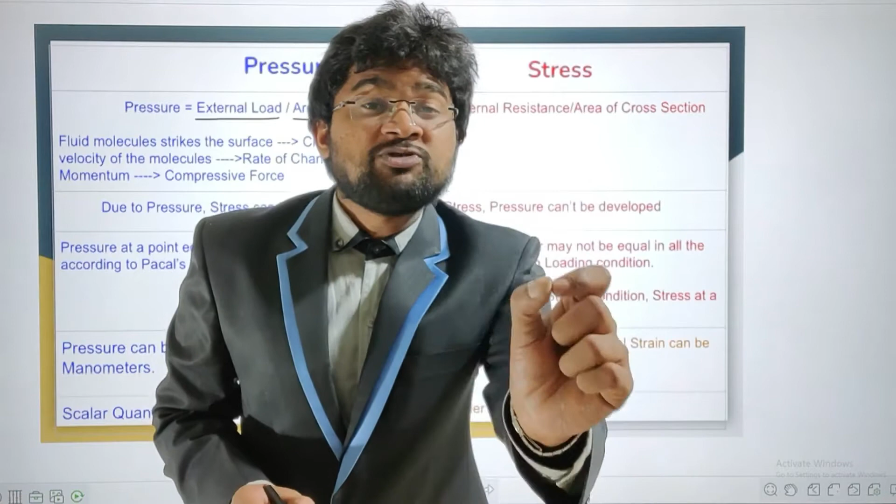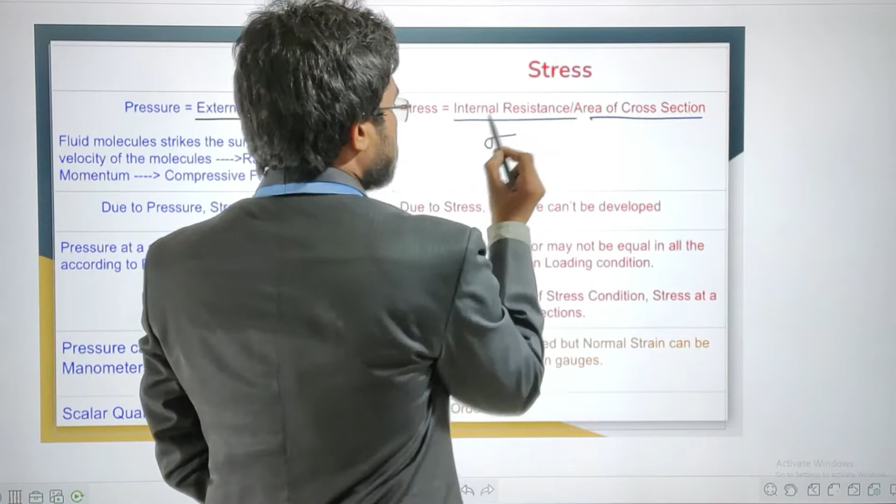Come to the definition of pressure. Pressure at a point is defined as the magnitude of external force acting per unit area of cross section. Now come to the definition of stress. Stress at a point is defined as the magnitude of internal resistance offered by the body per unit area of cross section. This is sigma, it will be P.

Now, if this question is asked in the interview, almost 90% of the people will give the same answer because everybody knows the definition of pressure and stress. But we need to give a different definition for pressure.

That is, we need to start from molecular level. Pressure is associated with the molecules. When these molecules strike the surface, the velocity of the molecules will change. Due to change in velocity of the molecules, change in momentum comes into picture. The rate of change in momentum is nothing but force. The magnitude of this particular force acting per unit area of cross section is called pressure. Pressure is always applied externally. It is always compressive in nature.

I want to give a single statement answer to differentiate pressure and stress. That is, if I pressure you, you will feel stress. Enough, both definitions are covered in a single statement. If I pressure you, you will feel stress. That is, the feeling should come from internally, pressure is applied externally. If your guide pressures you, you will feel stress. That is the single line statement for differentiating pressure and stress.

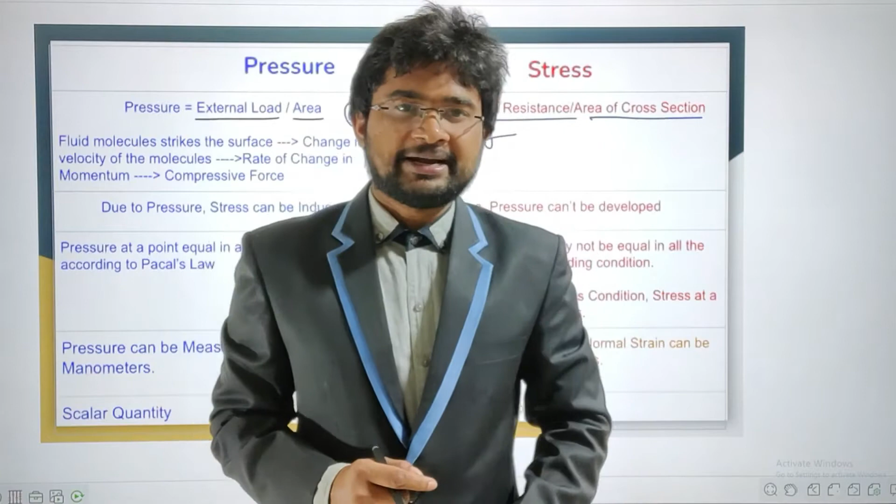Due to pressure, stress will be induced, but due to stress, pressure can't be developed. It is a very important statement. One more thing, pressure at a point is always compressive in nature, but stress may be either tensile or compressive. Pressure is a scalar quantity.

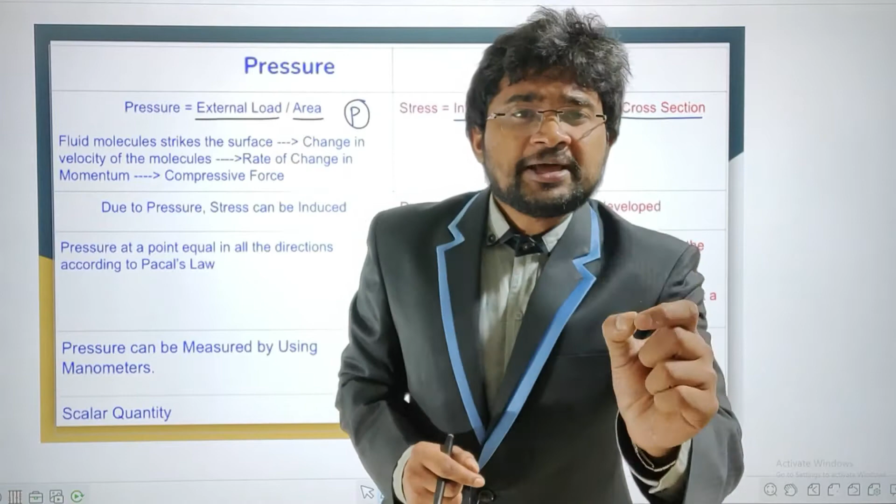Pressure is a zero order tensor. Stress is a second order tensor. We know scalar - scalar is a zero order tensor, only magnitude is sufficient. Go to some higher order - vector. To represent a vector, both magnitude and direction are required, so that is a first order tensor. To represent stress, we need 9 components, that is why we need to move to a higher order, that is second order tensor.

We need to represent the stress tensor in terms of a 3 by 3 matrix for triaxial state of stress condition. Coming to other examples of second order tensor, those are moment of inertia - it may be either mass moment of inertia or area moment of inertia, both are second order tensors. We need to represent moment of inertia in a 3 by 3 matrix.

Coming to rotation and image, both are orthogonal tensors. You can call them second order tensors - orthogonal ones. If the determinant of the orthogonal tensor is +1, you can call it a rotation matrix; if -1, an image matrix. Transformation is a combination of both rotation and translation. Translation is a first order tensor, that is a vector. Transformation is a third order tensor.

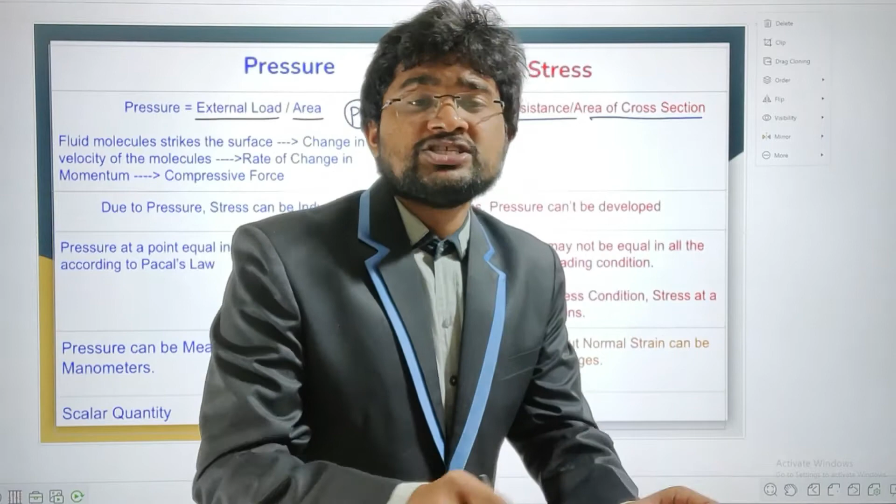According to Pascal's law, pressure at a point is equal in all directions, meaning it is independent of direction. That's why we call pressure a scalar. But stress at a point is not equal in all directions; it depends on the loading condition. Pressure can be measured using a manometer, but there is no equipment available to measure stress directly.

But normal strain can be measured by strain gauges. I conclude that pressure is defined as the magnitude of external force acting per unit area of cross section, while stress is the internal resistance offered per unit area of cross section. Pressure is a scalar quantity, while stress is a second order tensor.

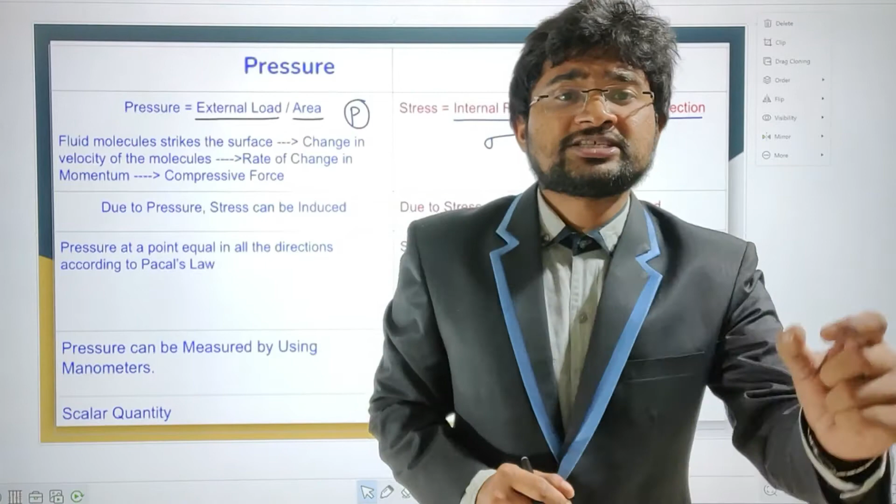Pressure at a point is equal in all directions, but stress at a point is not equal in all directions; it depends on loading condition. But for the hydrostatic state of stress condition, stress at a point is equal in all directions. Pressure can be measured, but stress can't be measured directly. Normal strain can be measured by strain gauges, and that is the input used to derive all the expressions of stress that you've already seen in the strength of materials course.

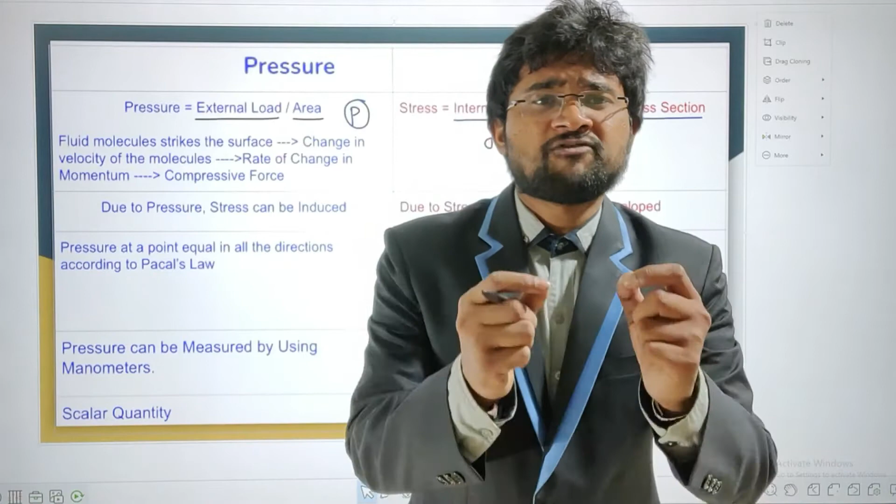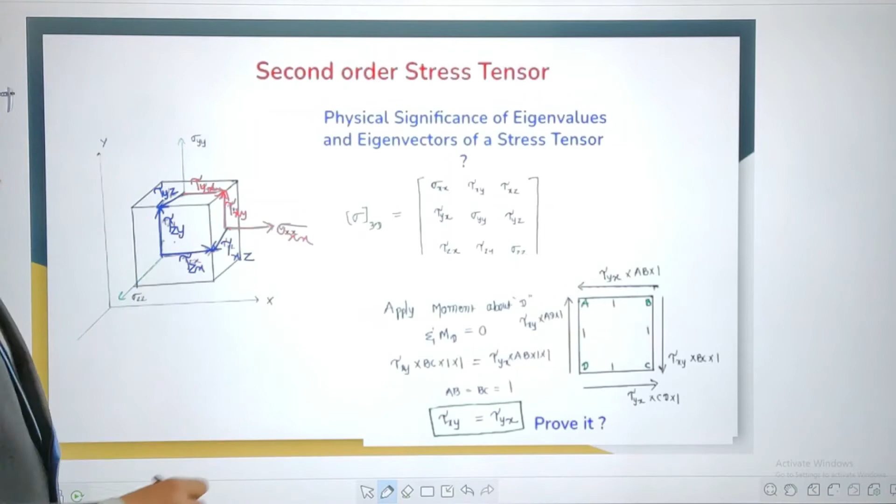X face and x direction. Here it is tau xy, x face and y direction. Here it is tau yx. Here it is y face and z direction. Tau, z face and y direction. Z face and x direction, x face and z direction. This is the box representation of stress. Stress is a second order tensor.

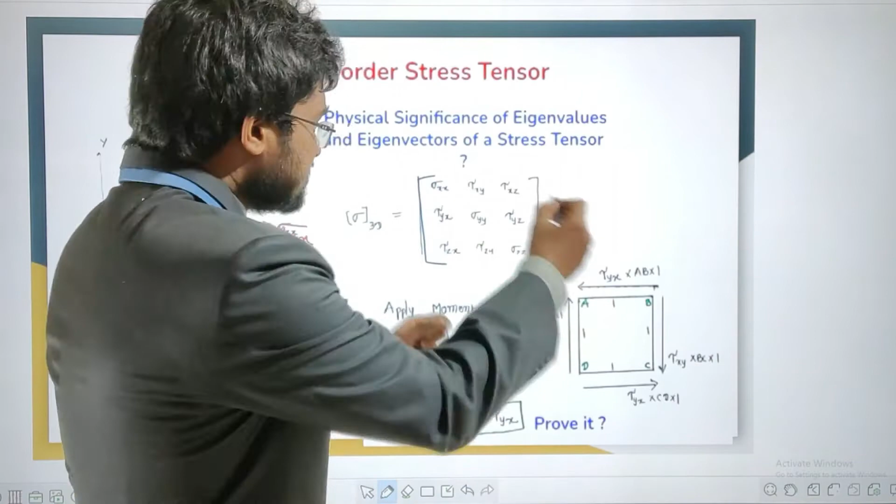Now the matrix representation of stress in 3D: sigma xx, tau xy, tau xz; tau yx, sigma yy, tau yz; tau zx, tau zy, sigma zz. This is the matrix representation of stress.

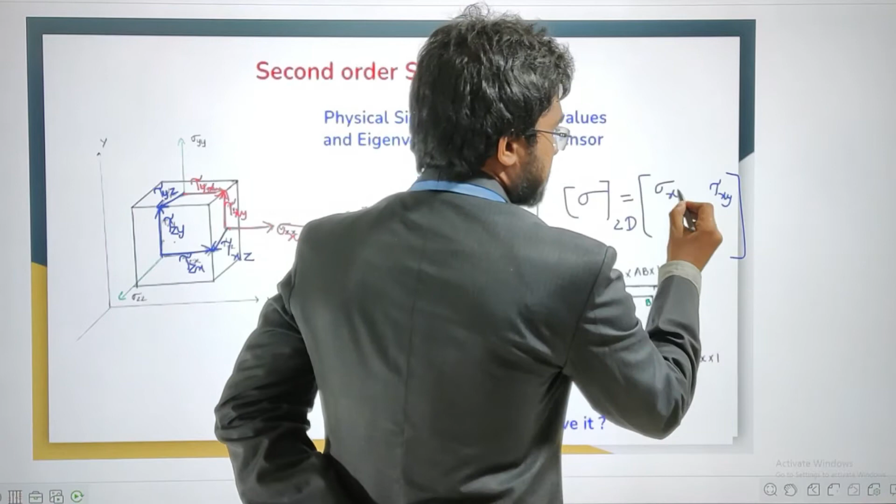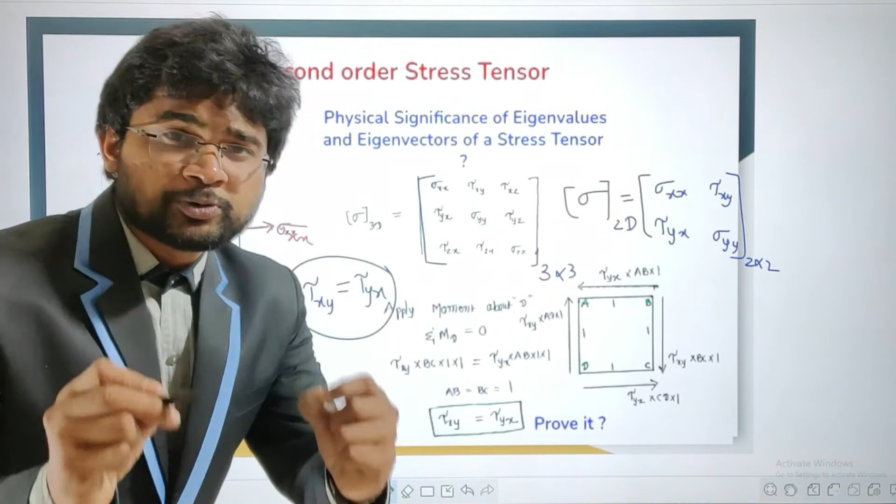Now if it is 2D: sigma xx, tau xy, tau yx, and sigma yy. This is for 2D. We need to prove tau xy is equivalent to tau yx.

State of stress diagram at a point for the pure torsion case. See here, this is... here it will be like this: x face in y direction is tau xy, and this is y face and x direction, tau yx.

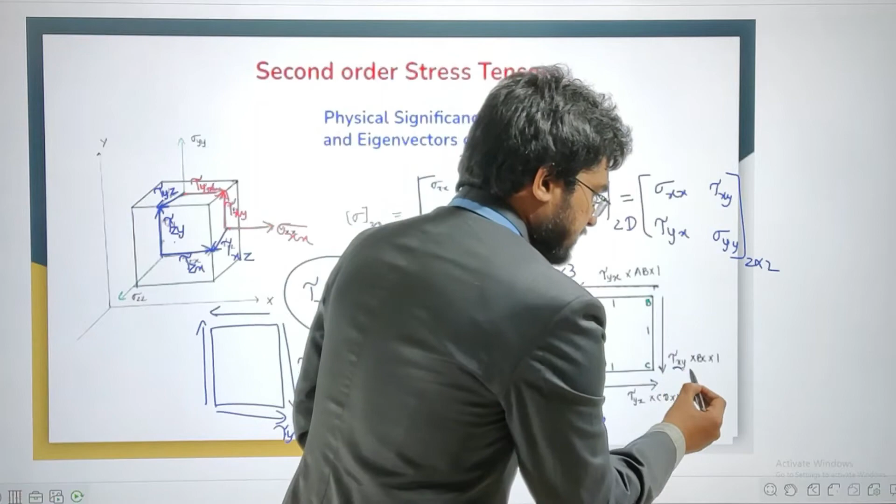I converted all the stresses into loads. Here, tau xy into BC into 1 — stress into area is nothing but force. So tau xy into BC into 1, and tau yx into AB into 1. I converted all the stresses into loads.

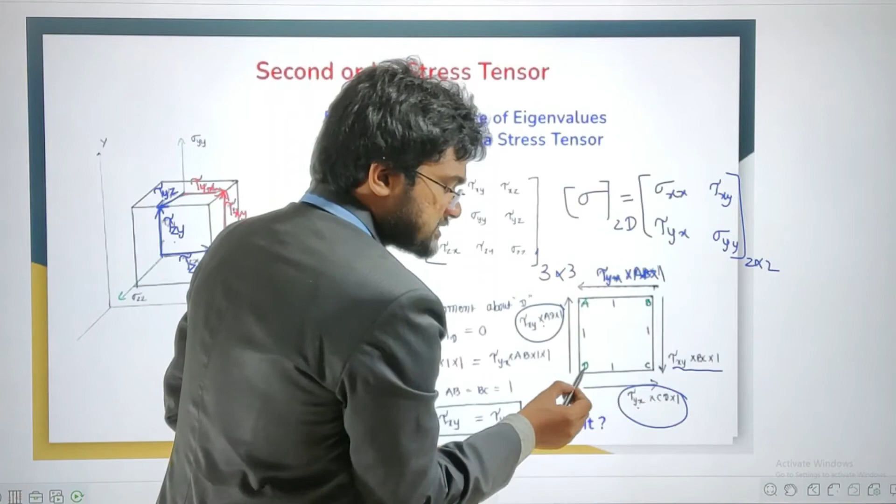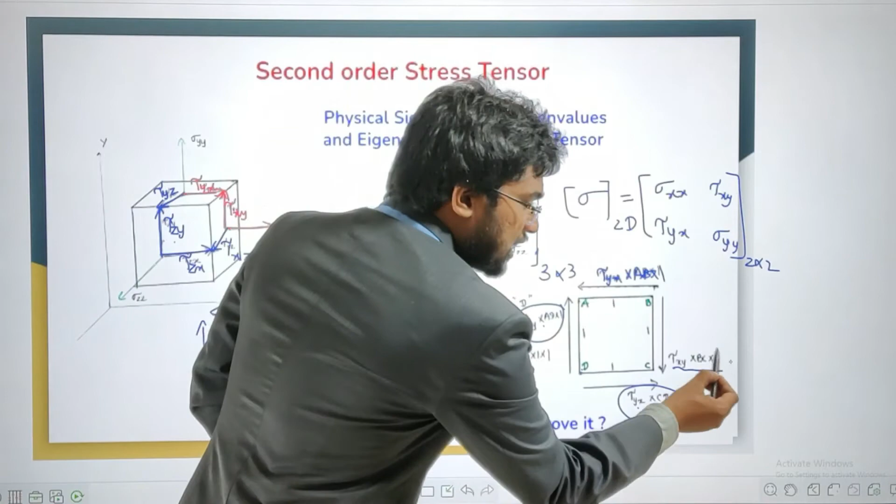Now apply moment about point D. The moment of these two forces about point D will become zero. The moment of tau yx into AB into 1 about this point will be in the anti-clockwise direction, and the moment of this other force about this point will be clockwise. Sum of the clockwise couples equals the sum of the anti-clockwise couples.

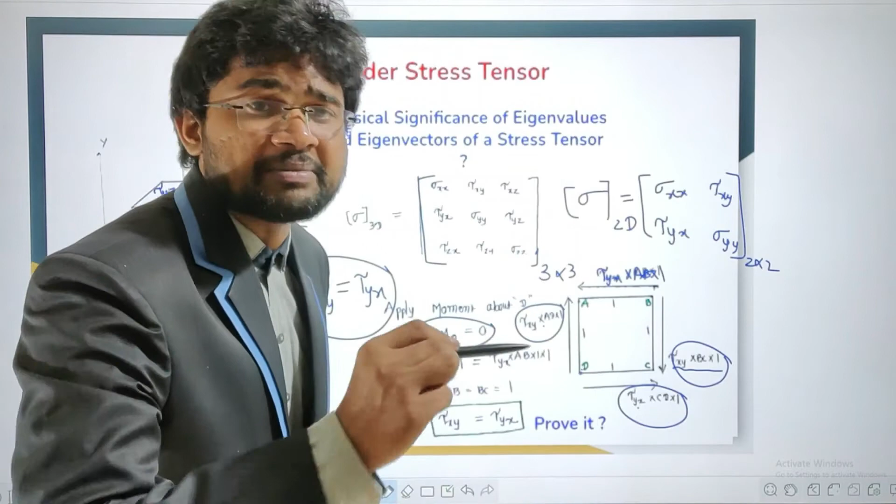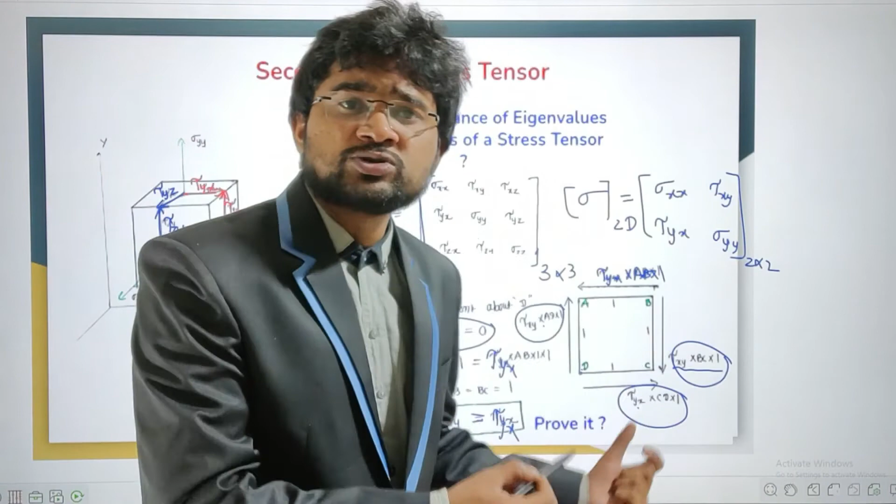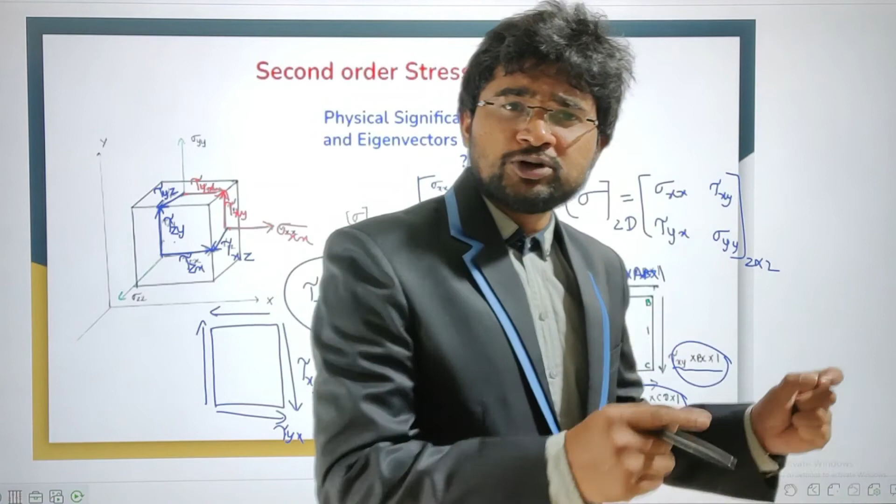I got this question from my friend. He faced this question in an IISc Bangalore interview for MTech. The interviewer checks your knowledge on whether the student is in a position to draw the box representation of stress and the matrix representation of stress.

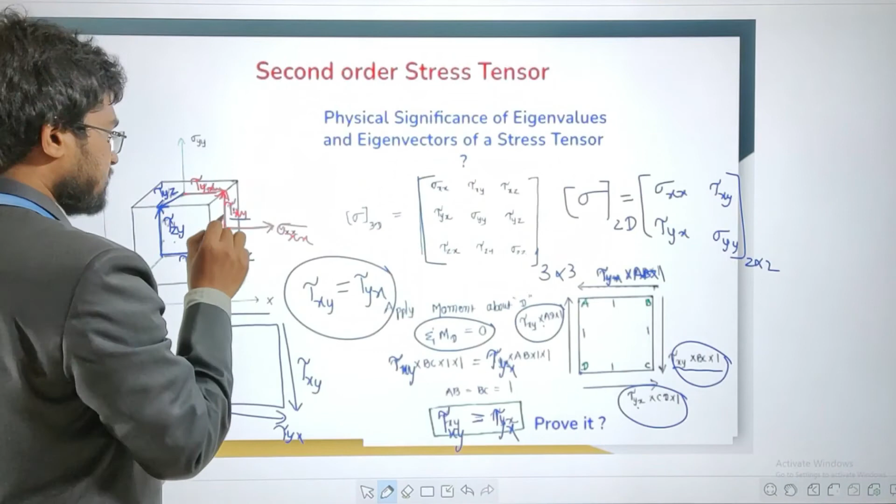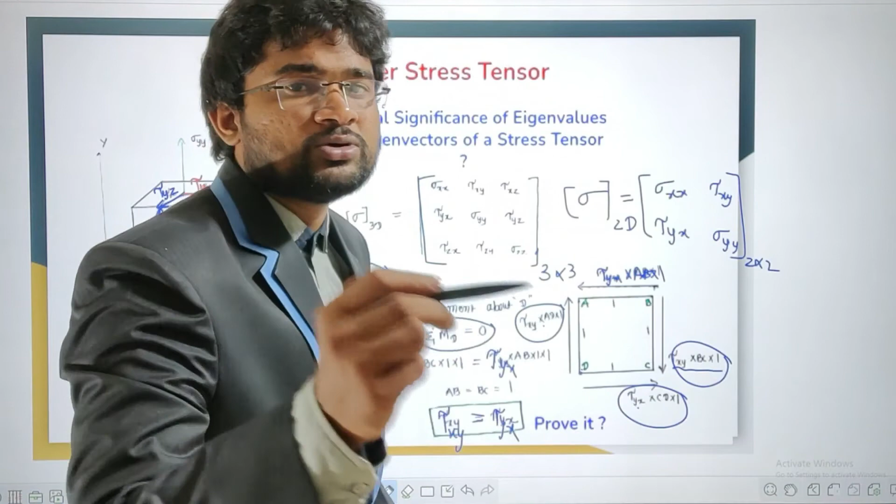What is the meaning of tau xy? Tau xy is the shear stress on the x face in the y direction. And whether the student is in a position to derive tau xy equivalent to tau yx — that is very, very important.

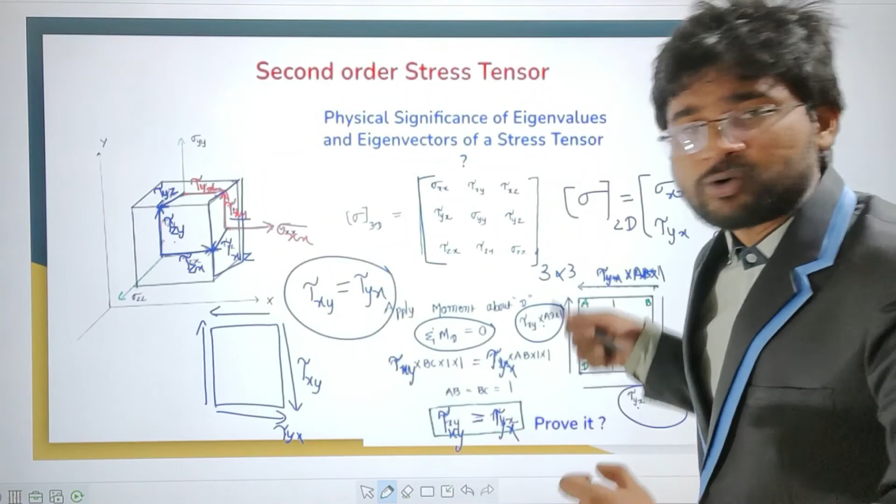Some good input for the students: stress is a second order tensor. We have drawn the box representation of stress and the matrix representation of stress, and finally proved tau xy is equivalent to tau yx. This is all about some introduction regarding stress and pressure. Thank you.